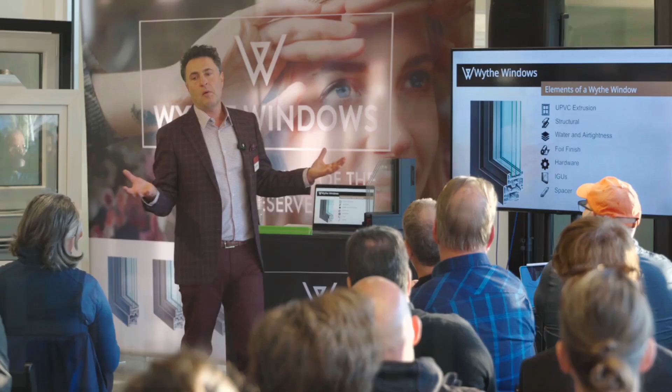What makes a good window? A window is made of 3 essential components: your profile, your glass, and your hardware, and how those things come together make up your window. They affect the structural performance, the airtightness, the look, and the operation.

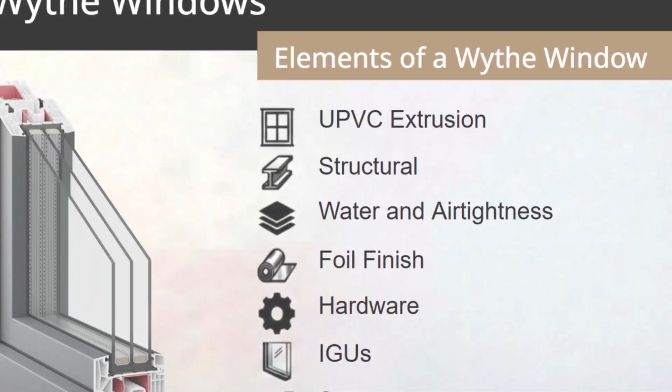Starting with the extrusion itself, that really defines the performance of the window. We manufacture our UPVC window. It has 6 chambers, or 6 thermal layers. We count those like this: 1, 2, 3, 4, 5, 6. Those layers are going to stop that heat from leaving through the frame and keep that energy inside the house.

Why did we choose UPVC? Well, we said to ourselves, how do we make the most elegant window, but also make it extremely high performing, but also make it insanely affordable so that we can make the biggest difference in the most amount of buildings. And this profile was what we decided on. Every window we make features this 2mm steel U-channel, which gives us great structural stability. So really, you're getting a steel window structurally with a blanket of UPVC wrapped around it.

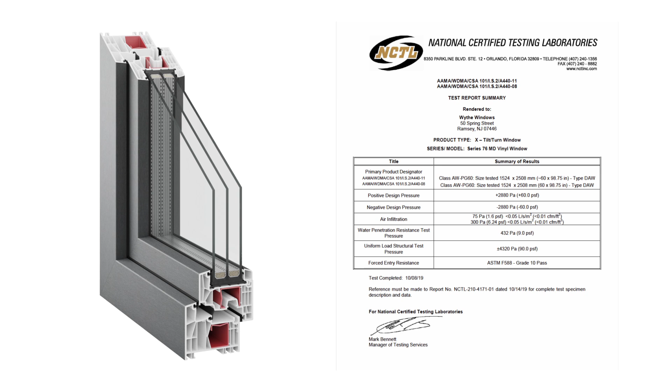The 2mm steel U-channel gives us an AW60. That's AAMA's highest grade for structural and water and air tightness. It's their highest rating for windows.

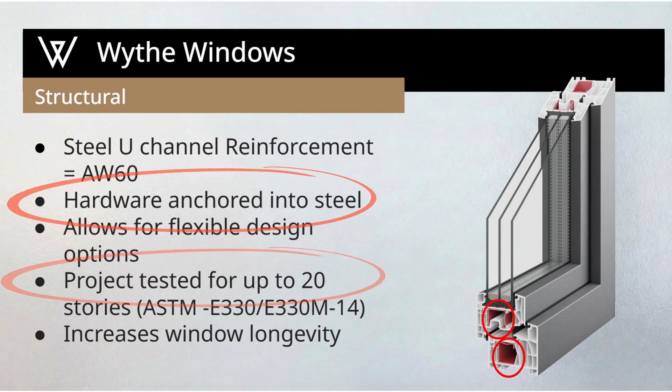Our hardware, we anchor back into the steel, so it gives us longevity and reliability for the operation. It's been project tested for 20 stories. We just finished a 14-story PHI certified passive house.

And that steel gives you great design flexibility in terms of how you can make really big sashes that open, with great design flexibility on the overall window itself. With our automated machining process, we can cut that window down to 0.5 millimeter.

Air tightness and water tightness are our primary responsibility in buildings. We want to keep people dry and we want to keep the building airtight, and our windows perform both exceptionally well. We've been tested at 12 pounds per square foot; our AAMA rating is 9 pounds per square foot. We have an air leakage rate of 0.01 cubic feet per minute, so it's a very, very airtight window.

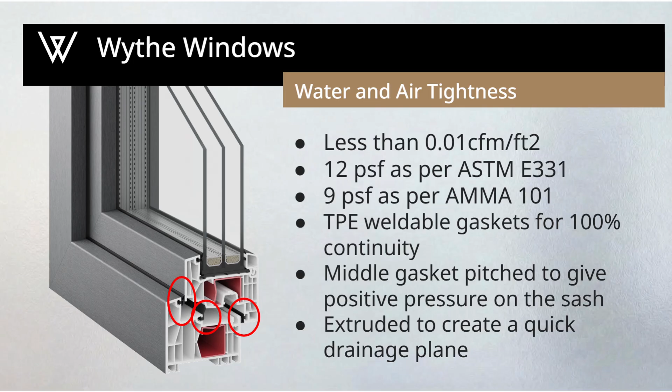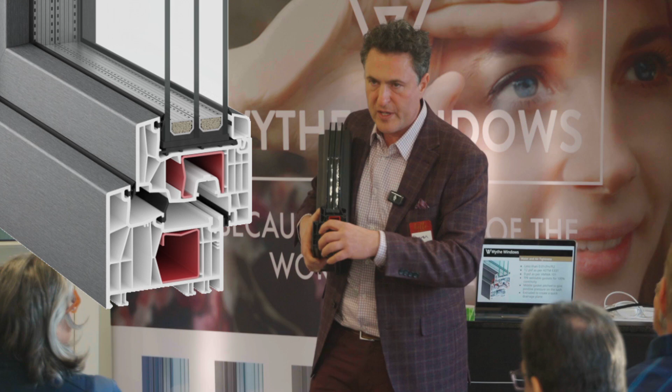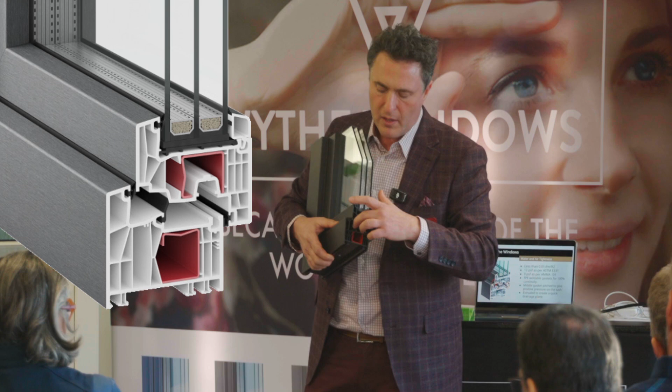I was talking about the gasket—the middle gasket. I love this middle gasket because it is leaning and putting positive pressure on the sash, but the extrusion is rigid here too at the bottom, and that creates a great drainage plane. So if any water did get past this on a high wind load day, when the rain's pounding and it gets past, it's going to hit this wall and drain right out the weep holes, keeping the building dry and everyone comfortable.

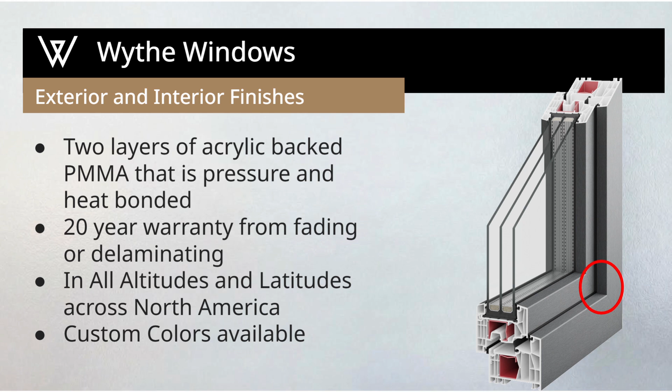As we said earlier, the window is critical in many roles—it's also your interior finish and your exterior finish. This coating here is 2 layers of PMMA, acrylic backed, then heat bonded and pressure bonded back to the profile. All our foils are UV protected and stable from fading or delaminating for 20 years, here in all of North America at every altitude and latitude—southernmost Mexico, northernmost Canada, all the peaks and valleys in between.

Nooks and crannies—the hardware. This is called the Euro Groove. What goes in the Euro Groove? Our hardware. When you see a fully operable window, all the hardware fits inside that groove. We use all mushroom cams, so when you open and close our windows, you'll see the hardware has a little cap shaped like a mushroom, which gives additional air tightness. The amount of locking points we put by standard on all our windows far exceeds the level of anyone else in this category.

We put locking points all the way around, and we optimize them, especially down on the hinge side. When we're doing commercial windows, we put snubbers down the hinge side for those commercial windows where you have restrictors on there. We have an NYC DOH approved restrictor so it's safe for occupants not to fall out, but we go the extra mile of putting snubbers down that side where you wouldn't typically be able to have that on a turn-only window.

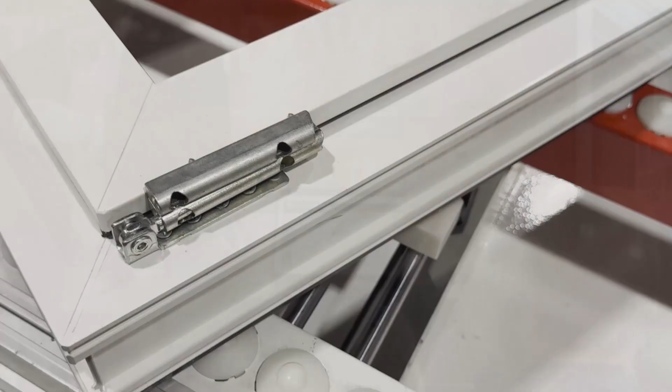One thing we're really crazy about is the bottom hinge. A lot of folks just put a hinge and screw it down, call it a day. We have a special hinge with long posts that we drill through the steel, and it goes into the posts, and we do this as standard. This gives us an additional weight capacity of 180 kilograms.

Glass packages. We don't say, oh, you're doing passive house, that's nice, here's our five glass packages, I hope one works. No, I say, hey, you've been working hard doing an energy model, show us your model and let's design a glass package to suit you.

Whether it's the center of glass driving the conversation, or visual transmittance, or OITC, or bird glass requirements, we can mix and match, and of course, let's not forget solar heat gain coefficient. We can mix and match all those different things and find the priority you want. I'm not going to tell you give me three values and I'll hit every single one. Designing glass is half art, half science. So I say, give us your most important priority and we design around that.

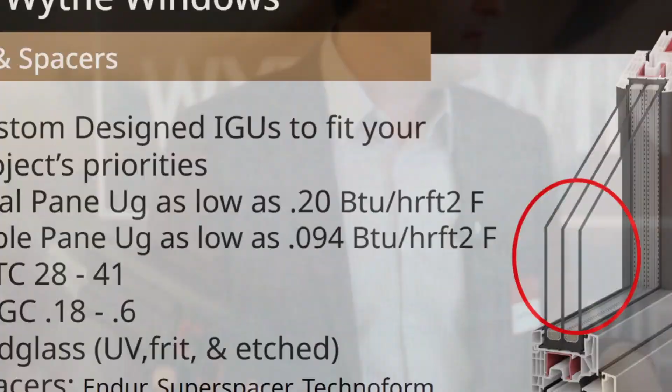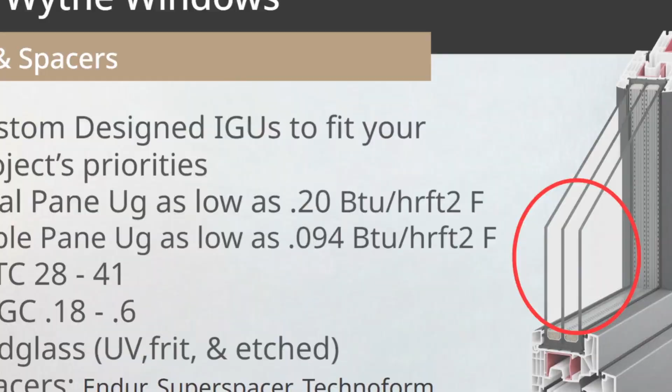Having many fabricators gives us the flexibility of working with many different spacers as well. The spacer is super critical to the performance of the IGU. In case you don't know, that's the spot, the space of glass in between. What the spacer is made out of really affects the overall performance of the window.

If you have an aluminum box spacer - my grandmother cooked with an aluminum pot and pan, that's good conductivity, right? But we don't want that in our window, we want something less conductive. Something like a Superspacer, which is a foam spacer, or a Swiss spacer, and Technoform spacer - those are hybrid spacers. A hybrid spacer is a stainless steel frame, less conductive than aluminum, with a polycarbonate top, and these are both filled with desiccant to absorb moisture.

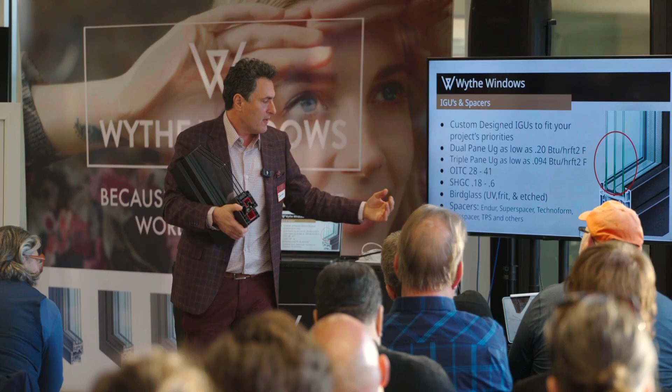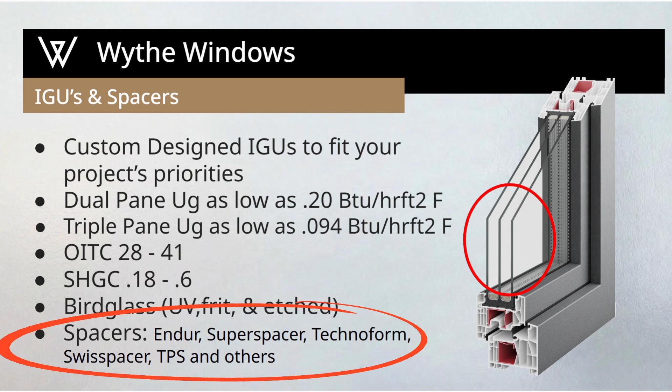Then you have TPS, which is coming online, pretty exciting. This is a thermoplastic spacer, very interesting because it has low conductivity. It's also extruded directly onto the glass when it's insulated. And we have many, many different types.